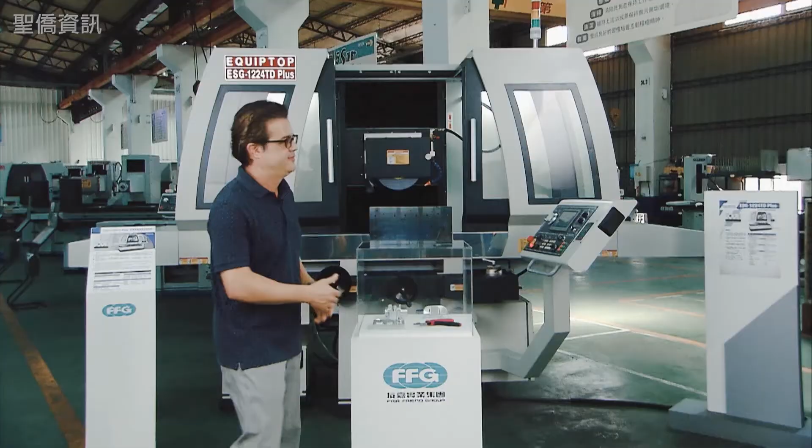Look at that. We're going to ask Charles, how did he do this? Charles? How are you? Nice to meet you too. How did you do it?

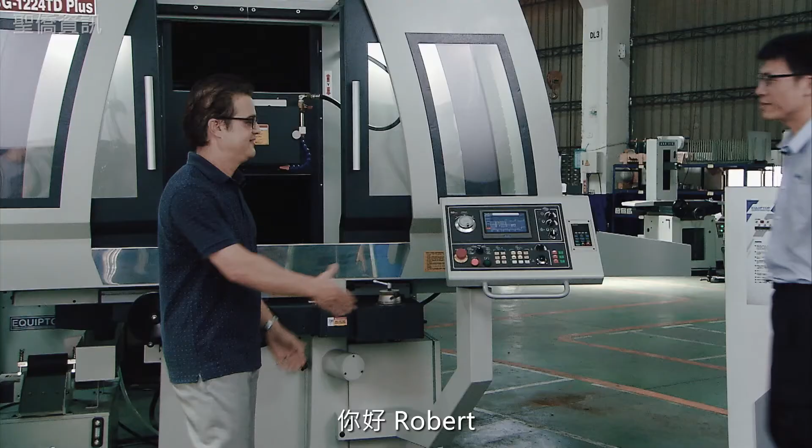Today we're at Equiptop, and we're going to have Paul Lin, the sales director of Equiptop, show us how to use this very well-designed touchscreen panel. Paul, can you show us how to use this? Hello, Robert. Nice to meet you. How's it going, Paul? How are you? I'm fine. Good morning, sir.

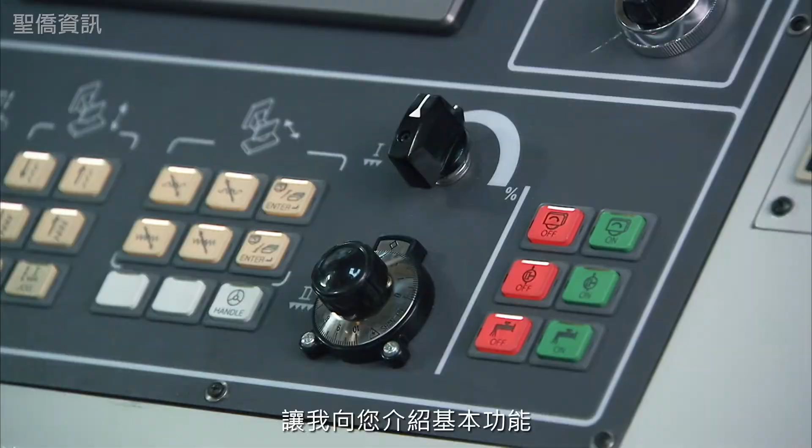Can you show us how to use this touchscreen panel? It looks very well designed, very well laid out. Let me introduce the basic function. This controller panel includes several languages depending on the demand from the customer. I'll show you the English version.

This machine displays the Y and Z position here by the encoder device. You can set the touch point and the distance to go, the position, and the rough grinding and fine grinding micron setting.

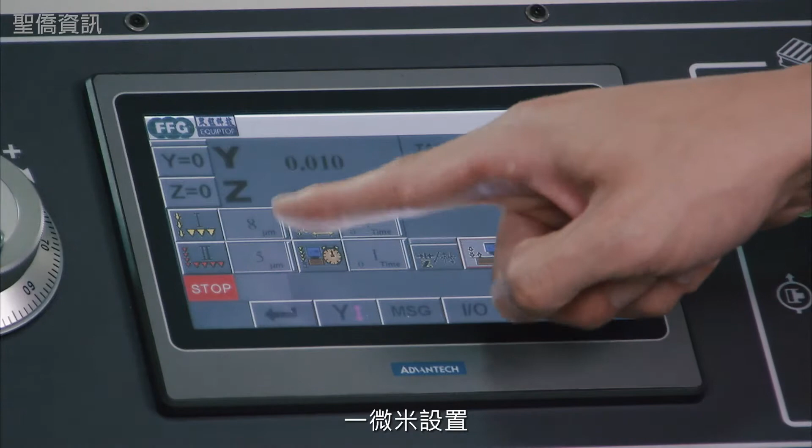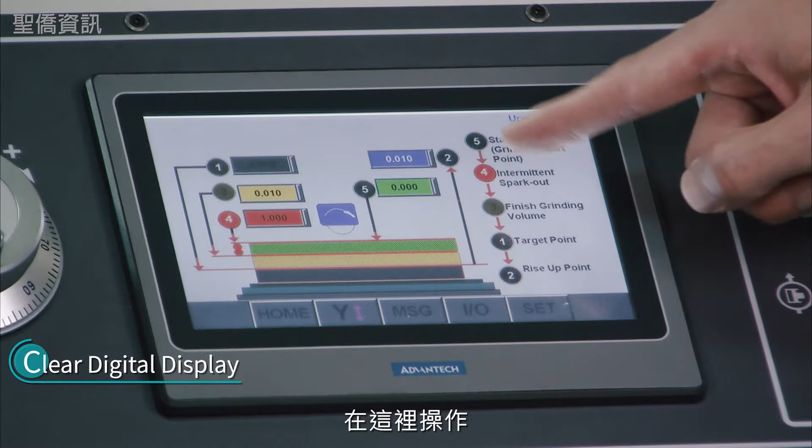This page is for setting the micro downfeed, the grinding value setting operation. You can set the target point, rise up point, and the finish grinding volume, intermittent spark out, and the start point. This page will show you all the alarm message recording.

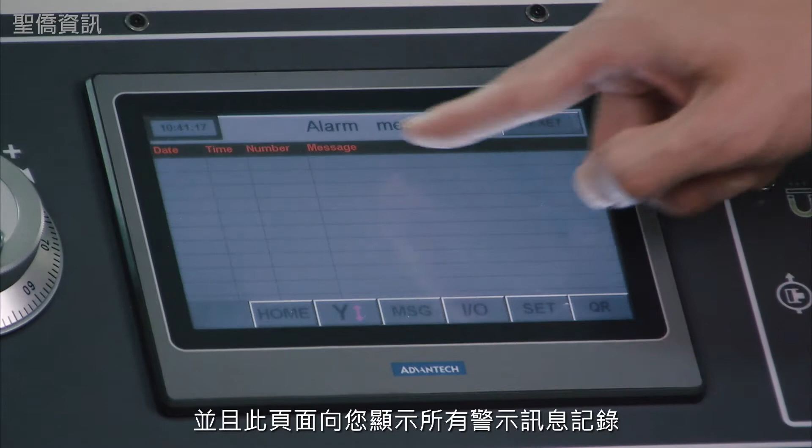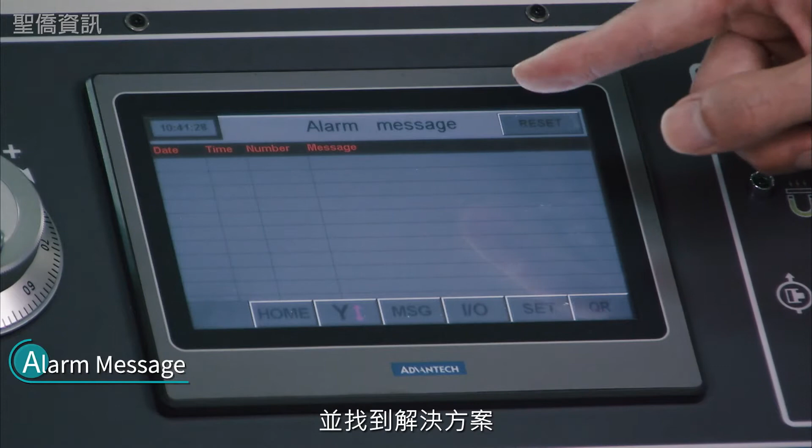Any problems, we can see it right here. We can see the alarm message showing here and find the solution with the technician and electrician immediately.

Also, this IO monitoring page is to check all the devices, including how this machine is running, such as the hydraulic system. You can see each device and what happened. This is very detailed and comprehensive.

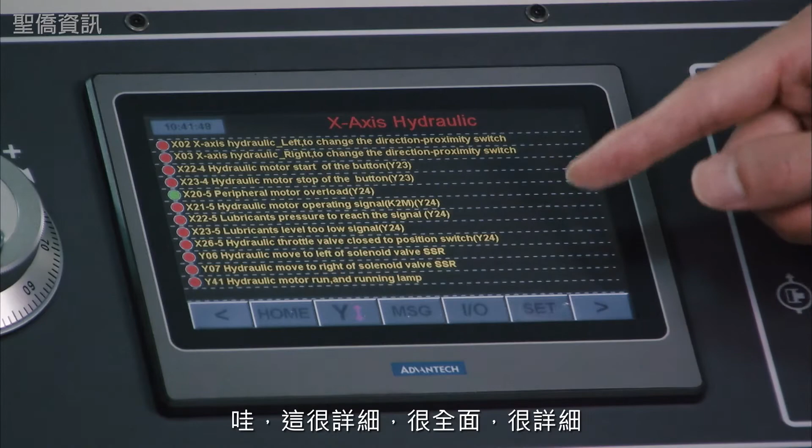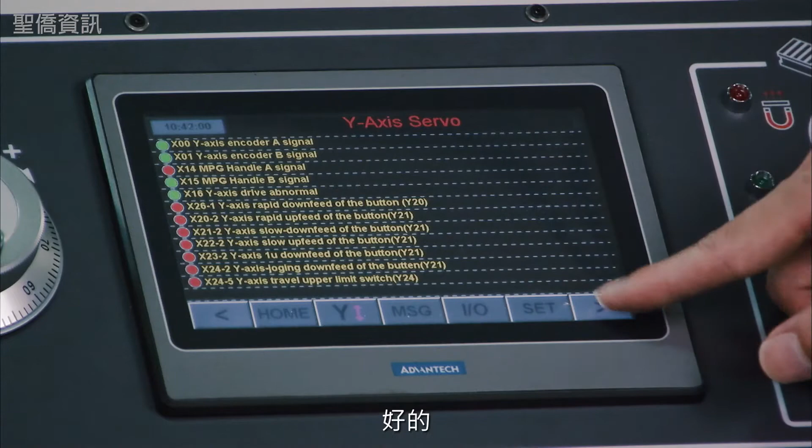You can see the servo motor for the Y-axis and its running condition here, like this one. And this is for the Z-axis servo motor.

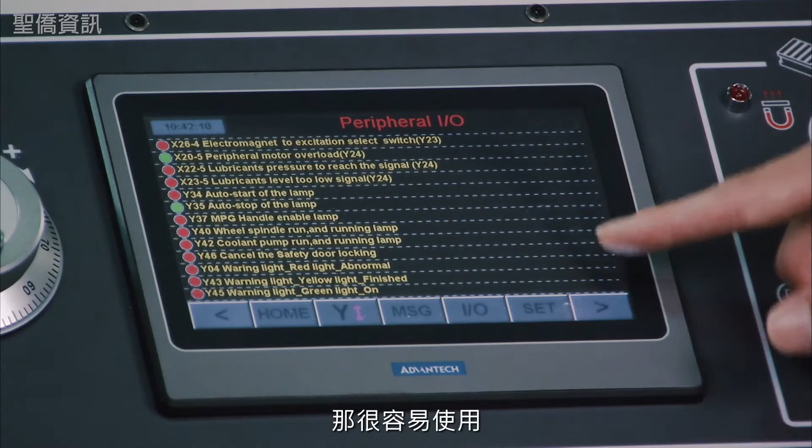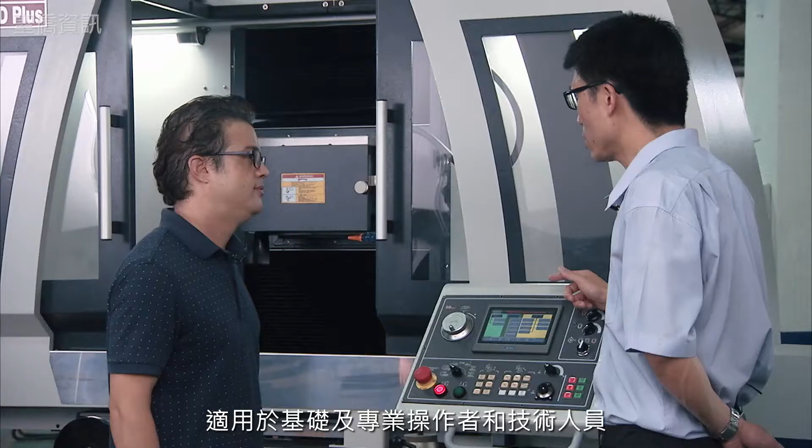It's a very nicely laid out panel. It looks pretty easy to use. It makes me want to get into the grinding profession. Sure, it's a friendly operation interface for the basic and for the professional operator and technician. It's easy to understand how to use it.

This is the parameter setting here. Any parameter could be set depending on the demand from the customer.

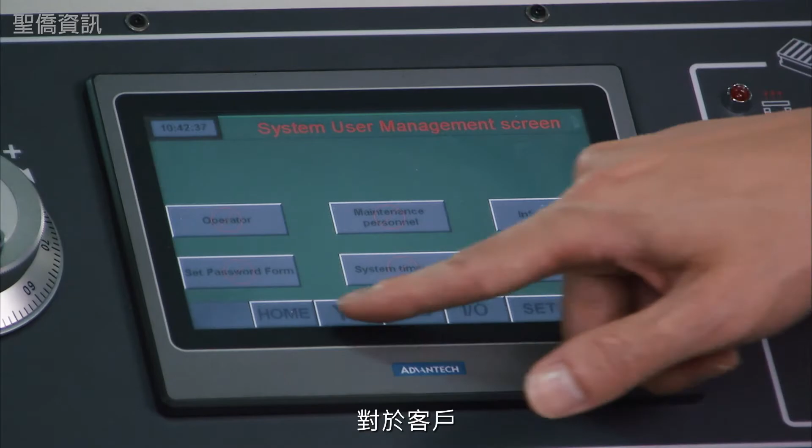So we'll show you the other function about this machine. Now turn on the magnetic power here, and adjust the magnetic power to the maximum here. And finish grinding. Now this is the demagnetizer - you can shorten the demagnetizer time here from this knob. This is a basic and easy function to control the magnetic power.

And this one is to control the grinding wheel, hydraulic system, and coolant system here. And this one controls the rough grinding speed, and this is the fine grinding speeds here.

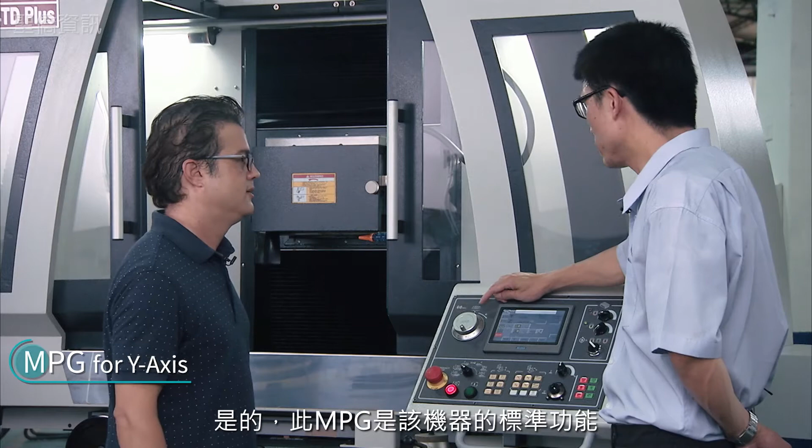I see you even have the MPG in the control panel. Yes, this MPG is a standard function for this machine. It could be adjusted 1 micron each down when you turn each graduation here.

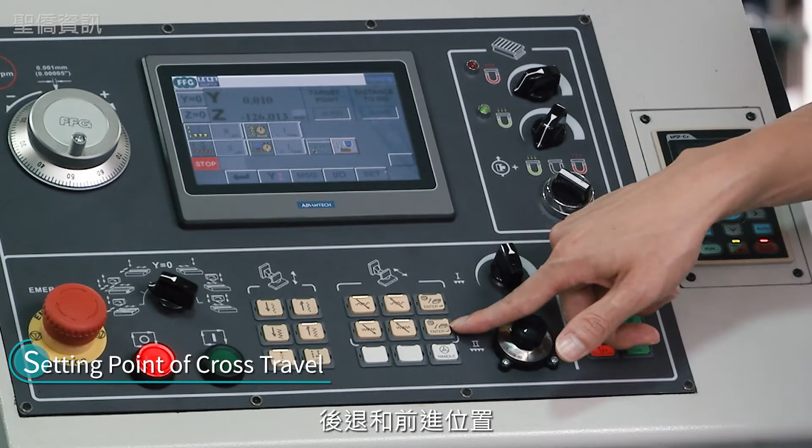That's very easy. It's a very fine resolution here. And this is for setting the setting point for backward and forward position. When you want to operate the cycle start here.

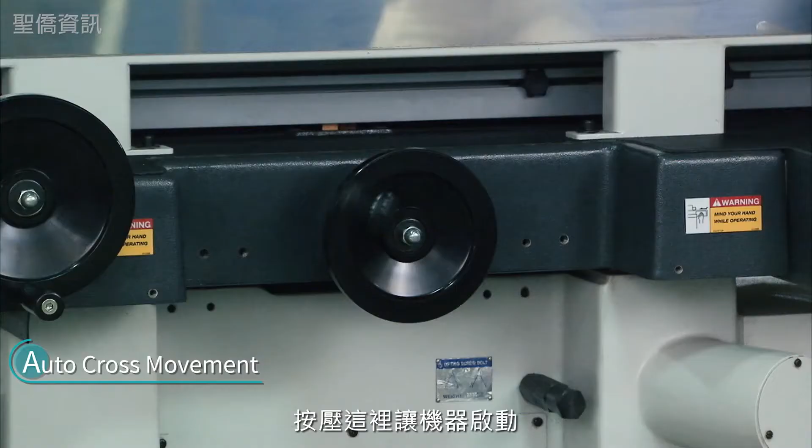Just push here. I think I can do this myself. Yeah, you can see it yourself. Very good. This moves the machine manually, and it's very easy.

You can see the real-time position. You can see the position to move the table, depending on the size of the workpiece here. This is vertical, up and down. And this jog is for 1 micron down.

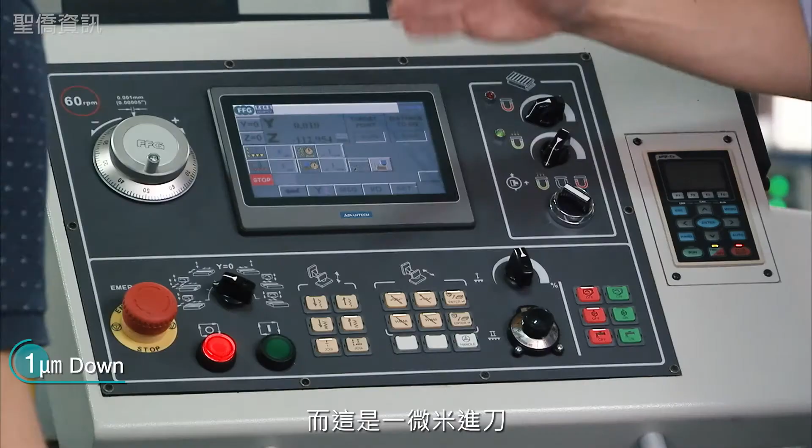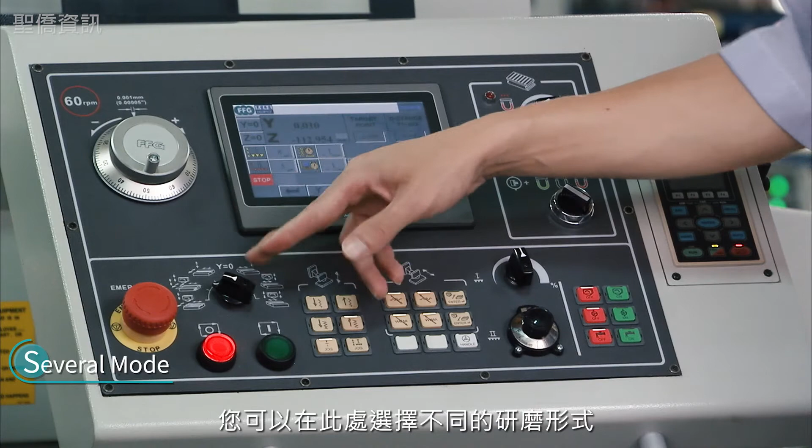You can select a different grinding mode here. So this is the standard and the professional grinding machine. Now, what is this over here?

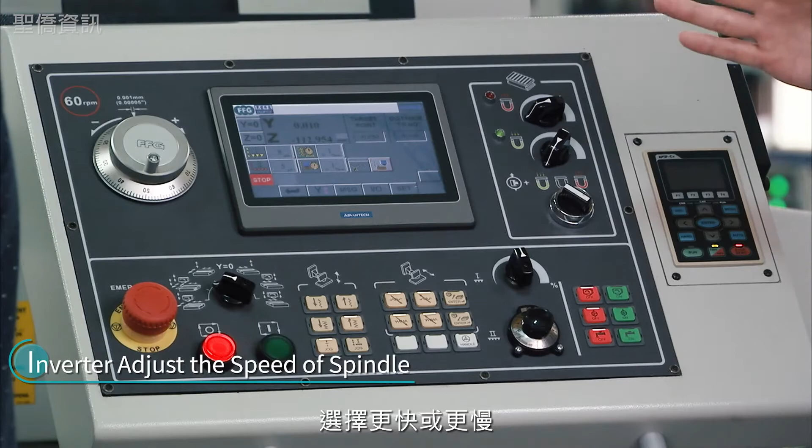This is the inverter to control and adjust the speed of the grinding wheel. So you can select faster or slower grinding speed, depending on the grinding material, to provide higher accuracy.

And surface finish requirements. Now, Paul, can you tell me a little bit about the structure of the grinding machine?

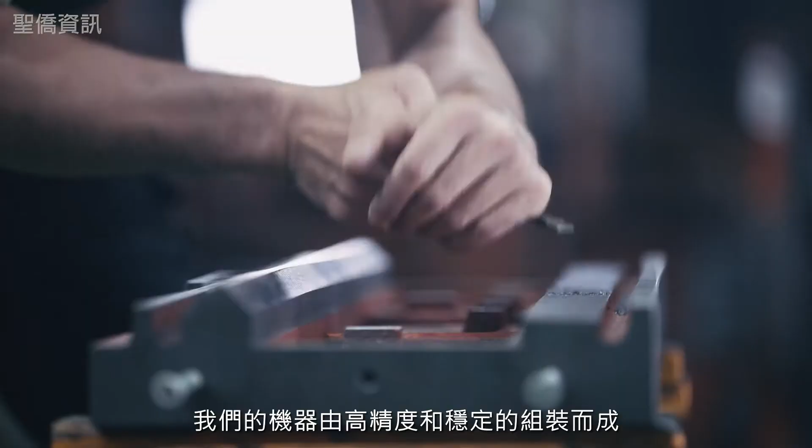That is a critical part for your whole operation, precision and accuracy. Our machine is constructed by high precision and stable iron casting supplied by Meehanite for the base, for the column, for the machinery body.

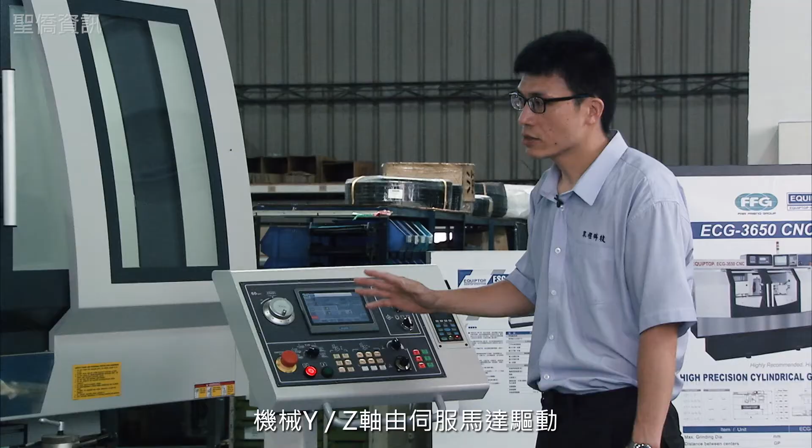The machinery Y and Z axis are driven by the servo motor inside the electrical cabinet, and the X axis is driven by the hydraulic system. This hydraulic valve controls the hydraulic power, to control the speed about the machine running.

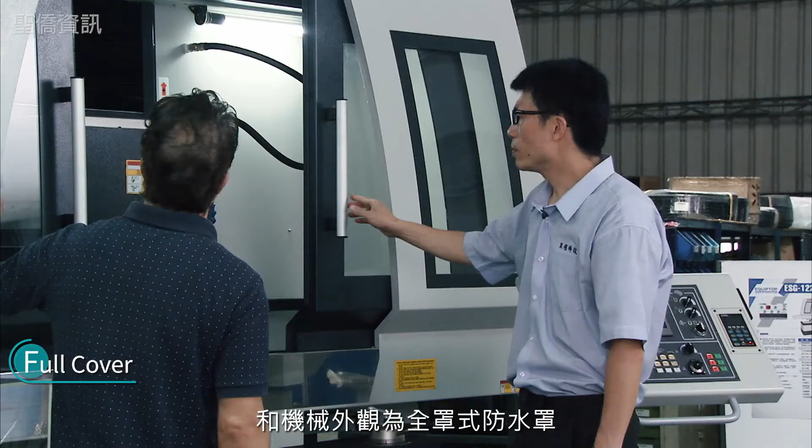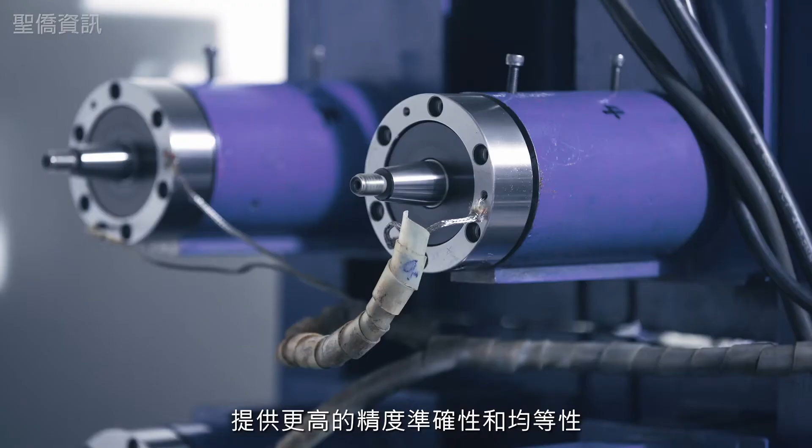The machinery overview has a full guard with top cover to provide better protection for the operators. And the bearing inside the spindle is supplied by NSK with higher accuracy and quality, precision, high quality bearings.

We can install the optional auto dressing system and the compensation system on top of the grinding wheel. Normally here it's an option, our ADC system.

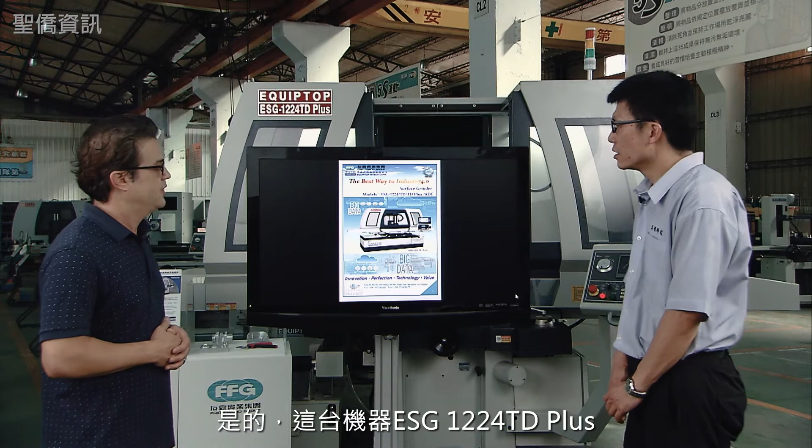Now we're going to hear from Paul more about the smart manufacturing capabilities. It's intelligent, it's networked, and it's got lots of features to help the operators. This machine ESG1224TD Plus is the best way to Industry 4.0.

Later I will introduce information about the network and monitoring system assembled in this machine. This machine includes cloud computing, big data, HMI, and IoT system. It also provides efficient network service such as integrated network information, in-time maintenance with guidelines, remote checking and system maintenance, reducing service time and increasing efficiency.

It also collects maintenance data and builds a database. The machine monitors all equipment continuously, setting parameters without temporary stoppage, and transfers and stores data in cloud service by internet.

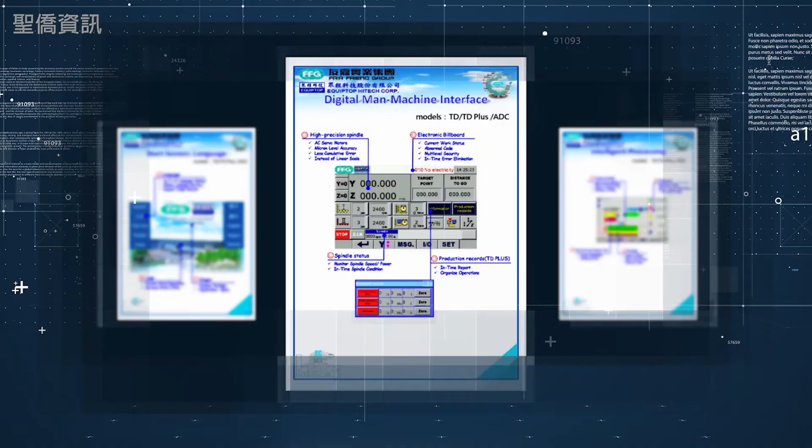The digital man machine interface includes the high precision spindle, the electronic billboard and production record, also spindle status. Intelligent processing includes rough grinding, a flow chart about the grinding value setting, and the grinding system, also intermittent spark out.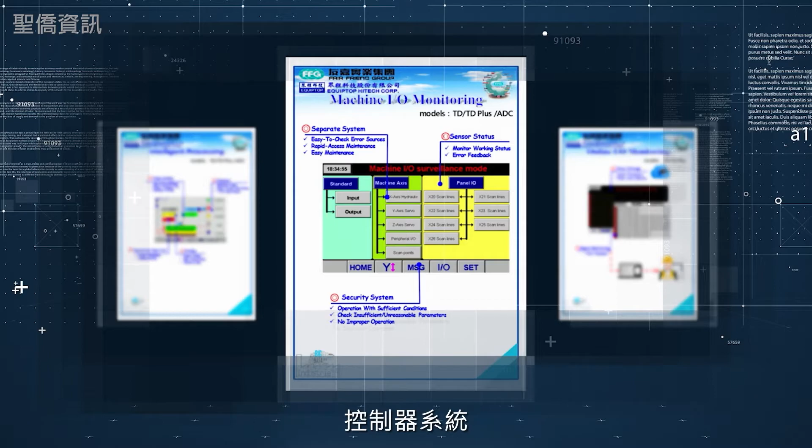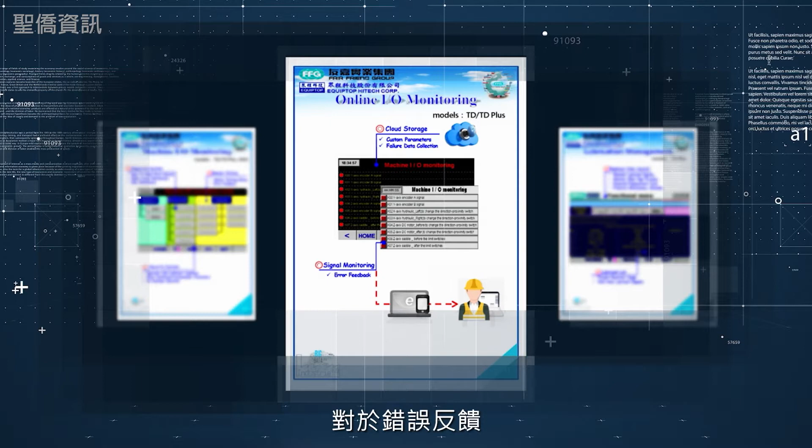The machine I/O monitoring is a separate system, and the sensor status also includes the security system controller system. The online I/O monitoring provides cloud storage and signal monitoring for error feedback from the manager and operator systems.

Lubrication management provides information about the lubrication oil, for when the operator would like to replace the lubrication oil and for other maintenance systems.

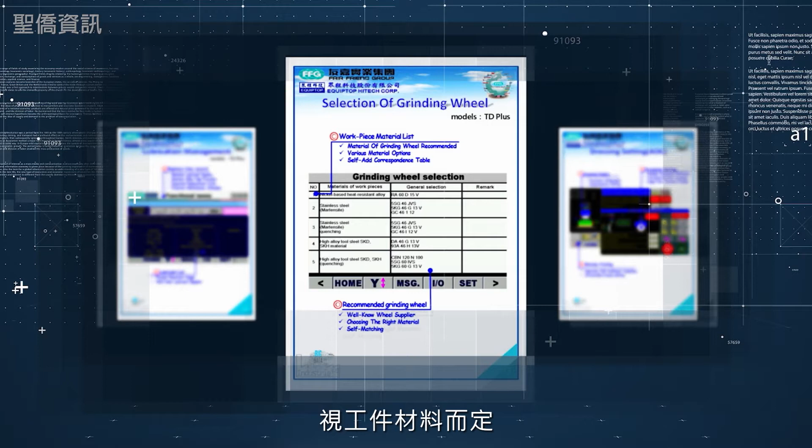Selection about the grinding wheel depends on the material of the workpiece, and the customer and operator can choose the available materials.

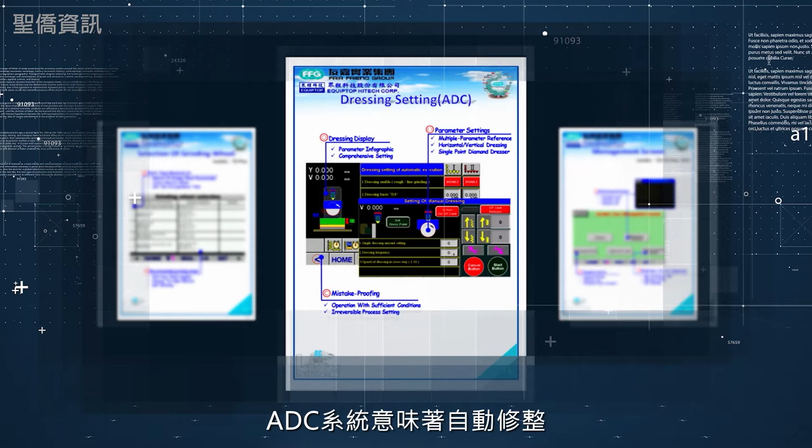The ADC system means the auto dressing and compensation system, and provides the dressing display, parameter setting and mistake proofing.

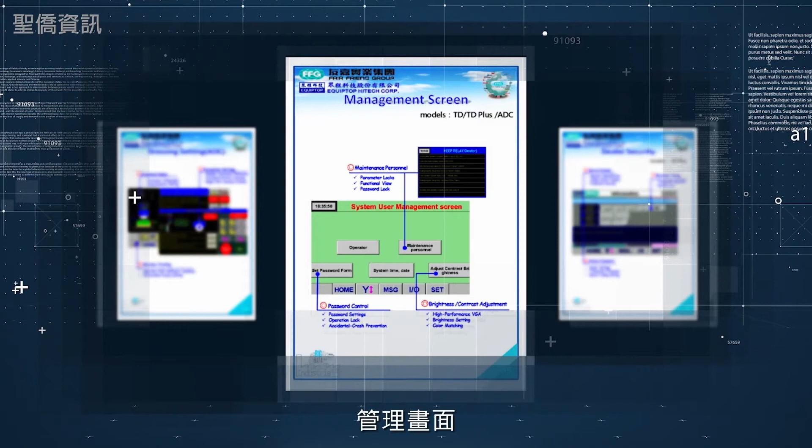The management screen includes parameters for maintenance personnel. And the dealer security system provides the machinery serial number, machine timing, and unlock password.

The big data database provides functional menus. The system maintenance provides machine maintenance parameters and setting parameters.

The driver debug is the alarm code that will be shown and displayed in the servo motor, and the customer and operator can refer to the menu operation to find the alarm code and find possible solutions.

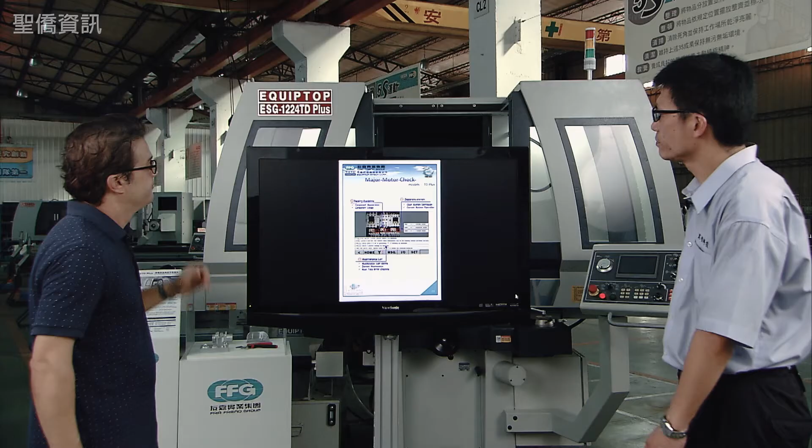Finally, this machine has received the patent certification about the controller in Taiwan, providing necessary and helpful information for the customers.

That's amazing, it's got so many features. You got a patent, you have smart features, it's intelligent, it's networked, it's everything somebody could want in a grinder. Thank you very much, Paul, for sharing this. Thank you, Robert.

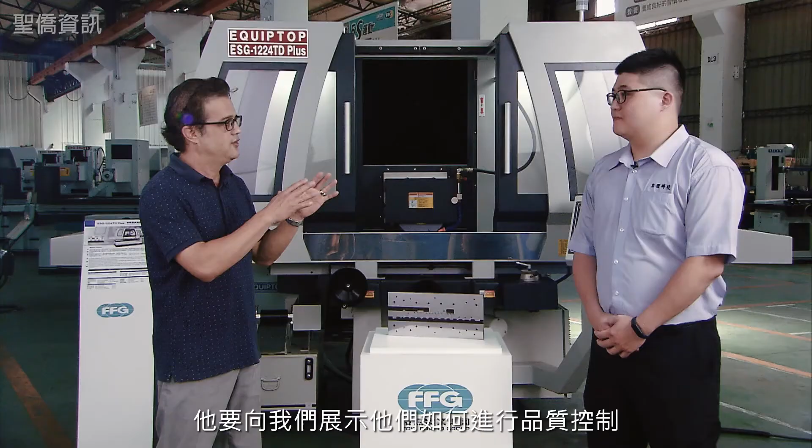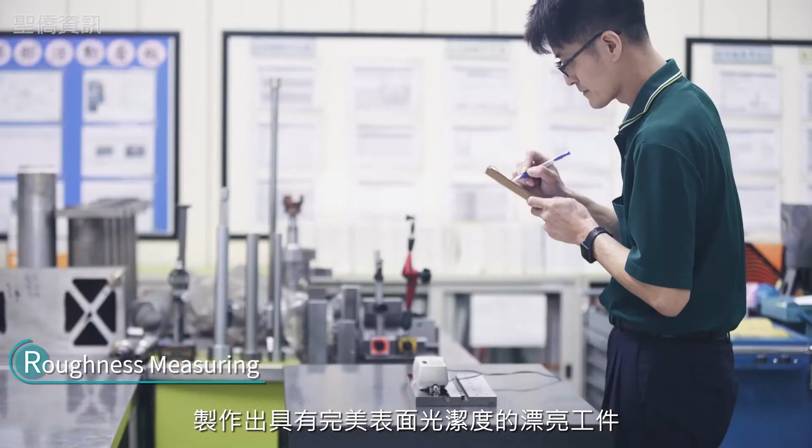Now we have James, a sales engineer with Equiptop, and he's going to show us how they do QC for this company. Welcome, James. Nice to meet you. Your boss said to make a beautiful workpiece like this with a perfect surface finish requires really important things, especially quality control. Can you tell us a little bit about how you guys do it here?

First, I want to introduce our spindle. That's the key part, very, very important for our grinding machine. In our spindle room, it's a small dust-free room.

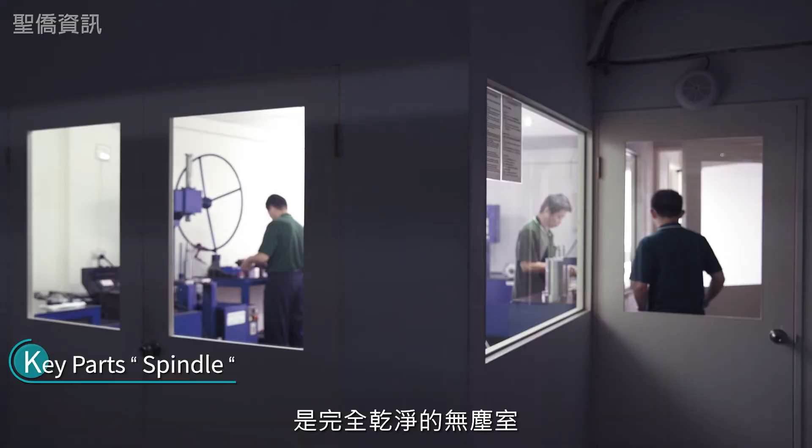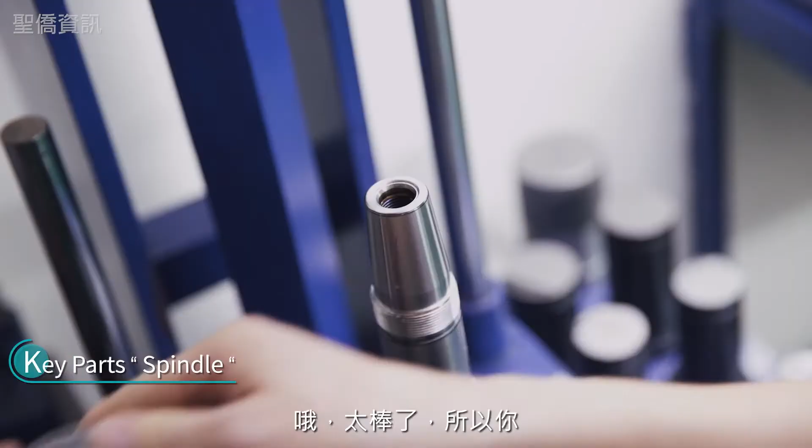We have to ensure our spindle will not be contaminated during the assembly process. So you assemble your own spindles? Yes. That's really critical, because if you handle this part well, it's going to make a perfect machine. That's great.

Now, I see lots of signs around here, and I'm feeling there's something different you're doing for your manufacturing and quality control. What do you guys do here that's different? Yes, let's call it lean manufacturing. Oh, lean, yes, it's strong. It's very strong, and the most important part is continuous improvement.

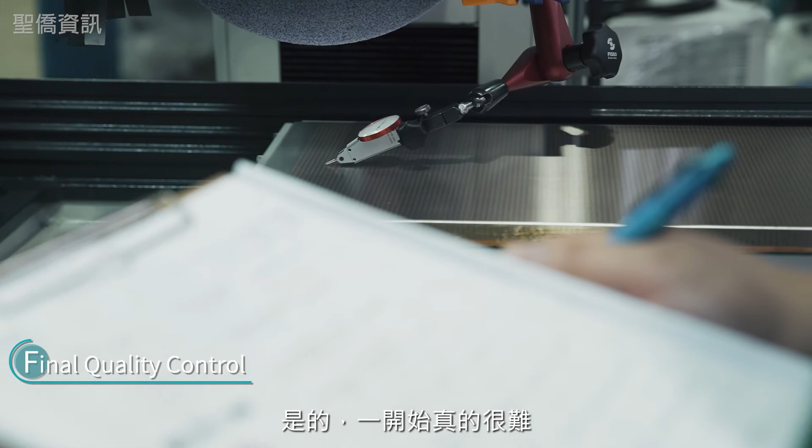Now, that's not easy to do. I hear from a lot of people that this kind of system is very painful at the beginning. Yes, it's really, really tough at the beginning, but after you use it, you will rely on it day by day, so you can keep away from problems.

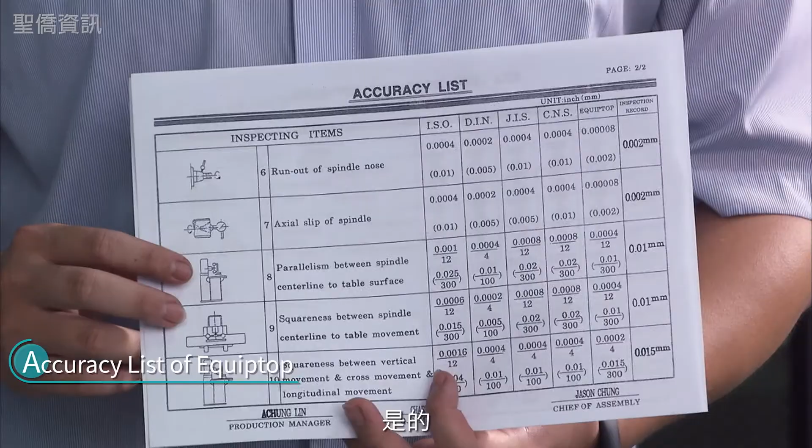Perfect. Now, I saw that you have some kind of list here. This has something to do with how you inspect each machine, right? Yes, this is our accuracy list, compared with international standard inspection like ISO, DIN, JIS, and CNS. So we set up our own standard.

So all these Equiptop standards are a bit higher than international standards. Even quite a bit higher than international standard.

Well, let's see some grinding. Can you show us? Okay, let's go.

Now, Equiptop has said they've sold over 2,500 of these TD series machines around the world. That means there must be lots of customers who have good things to say about these machines, right, Paul? Yes, sure. The areas we're selling our machines not only in Taiwan, but also United States, European countries, Asian countries, and other countries too. So later we will show some witness videos from our agents around the world. Excellent. That means we have some good things to see. Stay around and see some witness testimonials.

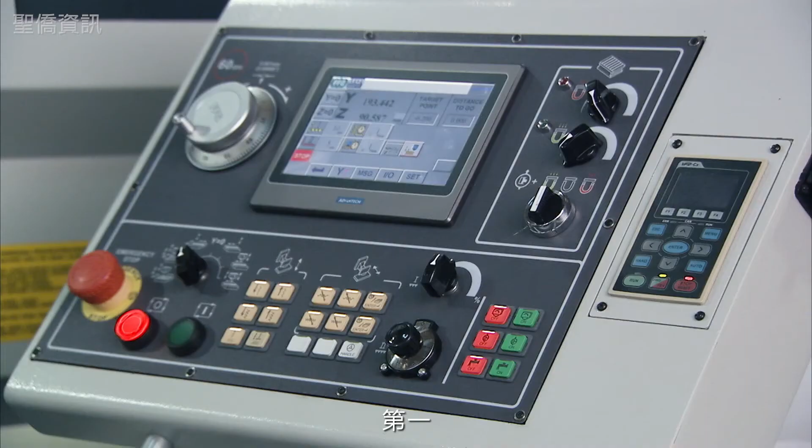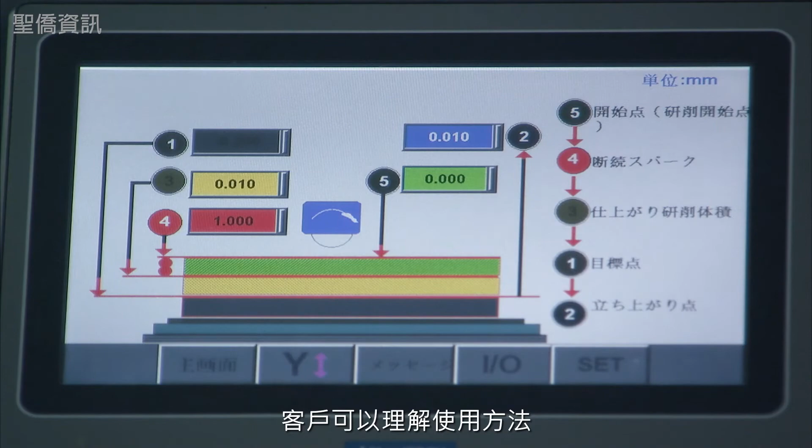The main difference between our machine and the competitor: first, our machine can input and include several languages for different customers, so the customer can understand how to use it through messages in different language versions, making it easy to operate the machine.

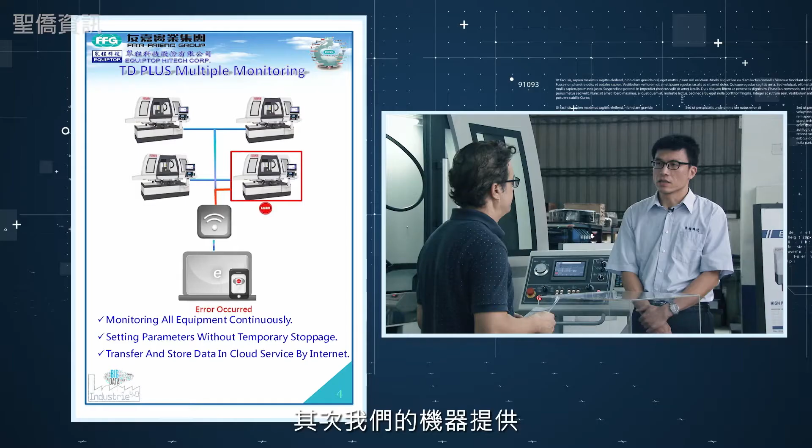Second, our machine provides an instant monitoring system. This is very important, as the service engineer and electrician can find a possible solution according to the alarm codes displayed on the controller panel.

Third, our machine could be installed with an auto dressing and compensation system on top of the grinding wheel, so the grinding wheel doesn't need to move down to the table to be dressed. The wheel can be dressed immediately by the dresser in the auto dressing device.

And finally, our machine has over 2,500 machines sold to the world. No matter in Taiwan or in other countries, they are our best witness to our machinery's high quality and best information systems.

Now, when comparing your machine with other machines, of course you have very top and tough competitors from Europe and from Japan. How do your machines compare to some of those top brands?

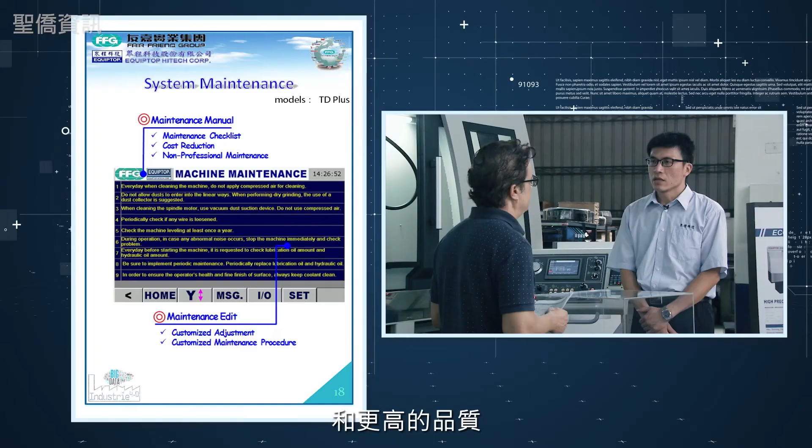Compared with the other competitors from Europe or Japan, we can provide the machine with lower cost and higher quality. Our machine provides an instant service system inside, with network and monitoring systems, so it's better. Higher CP - cost and performance - much higher.

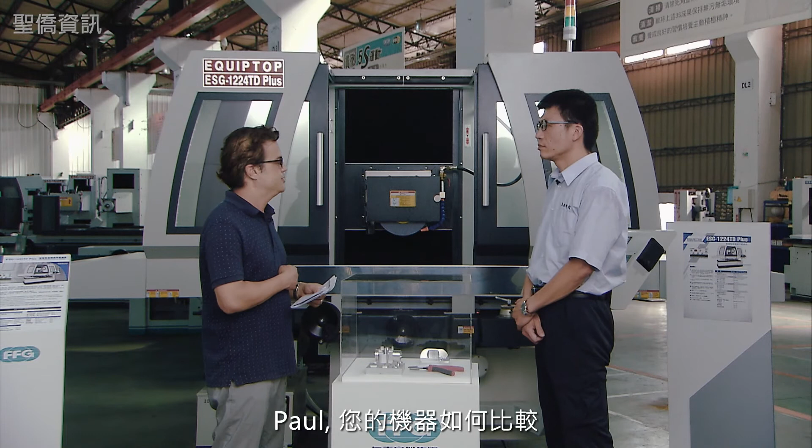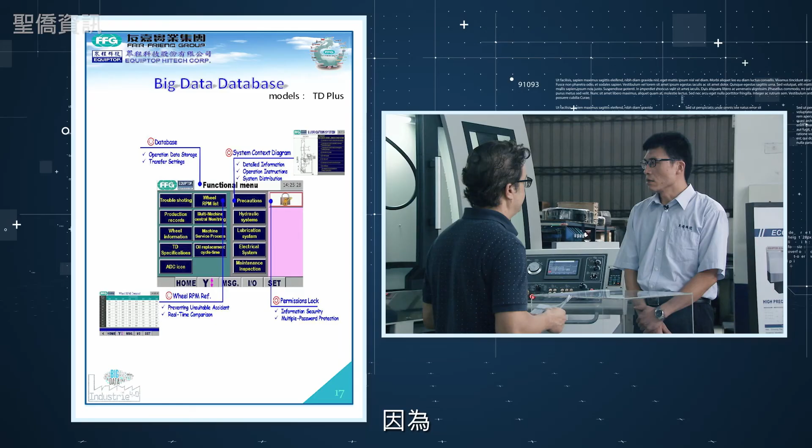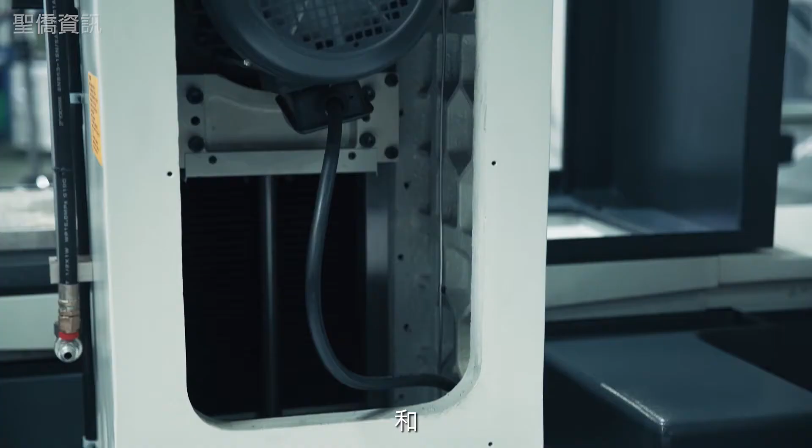How does Equiptop compare from a quality standpoint with European or Japanese machines? Our machine provides higher accuracy because the monitoring system inside provides necessary and helpful information to support the technician and operator to find a possible solution. Our machine also provides stable operation and nice quality due to the nice iron casting during assembling.

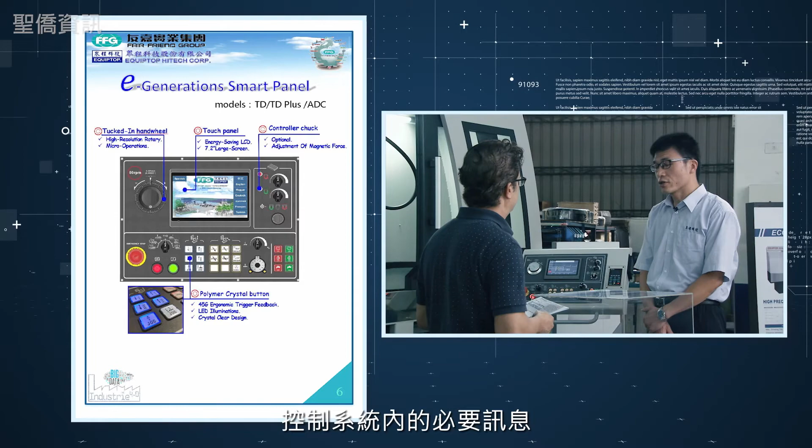When you compare to these other famous brands, like Studer, what are the major differences? I think the main feature of our machine is the necessary information inside the controller system, providing helpful and instant service information to support the operator. If they find a problem, the operator can find a possible solution immediately through information such as the grinding wheel data and short troubleshooting information.

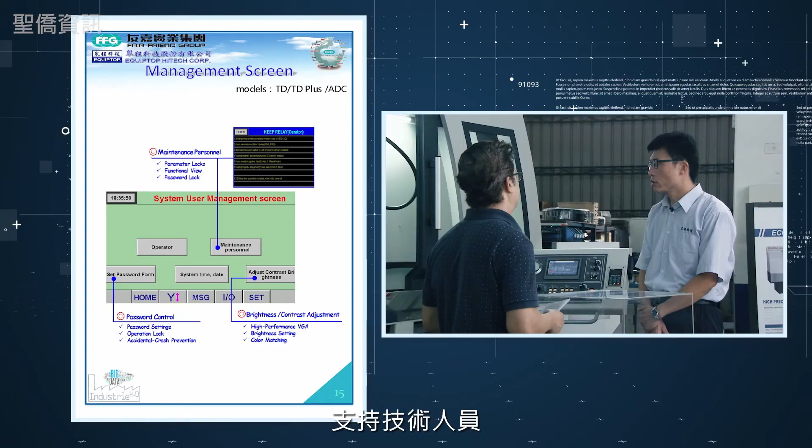This is all within your database system, right? Yes. You have an extensive database - you've sold 2,500 machines, so you have a huge amount of information. Our database inside the machine includes a lot of helpful information to support technicians during the grinding operation. Our machine helps find a possible solution if any alarm call shows, providing necessary information like menu operation instructions.

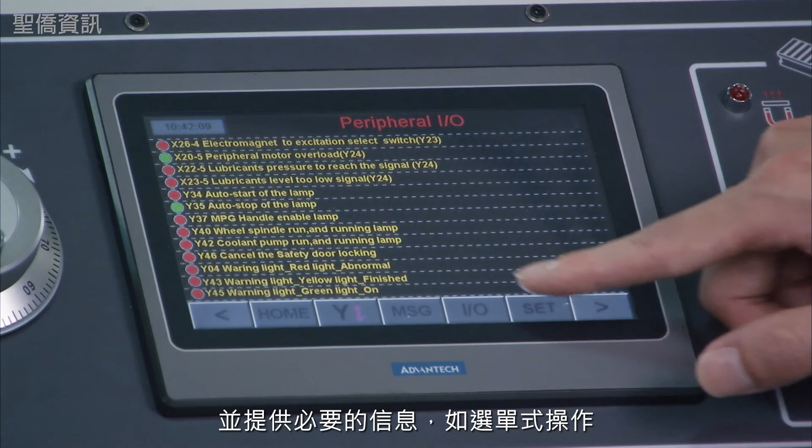But the technician doesn't need to find the paper operation manual - they can use the controller to find any possible way. That's very helpful.

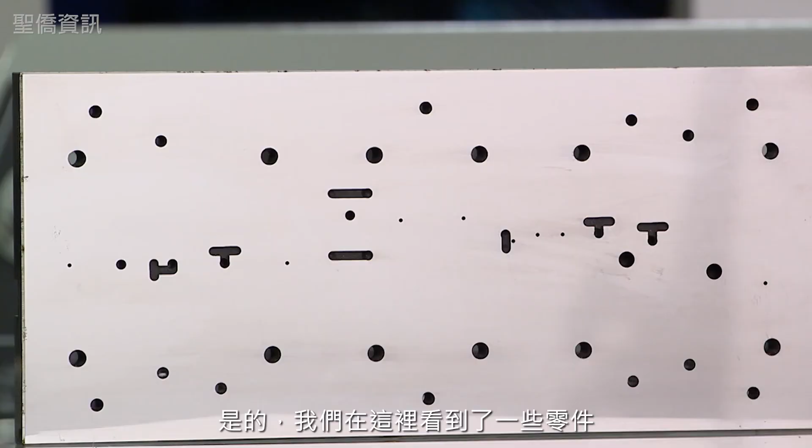Now, how about application-wise? What kind of applications or industries is this machine suggested and recommended for? Our main customers using our machine focus on the mold industry and auto parts industries. They can grind the mold with basic rough grinding or fine grinding to achieve mirror surface grinding, like some of the parts we saw earlier, here with the mirror surface grinding application.

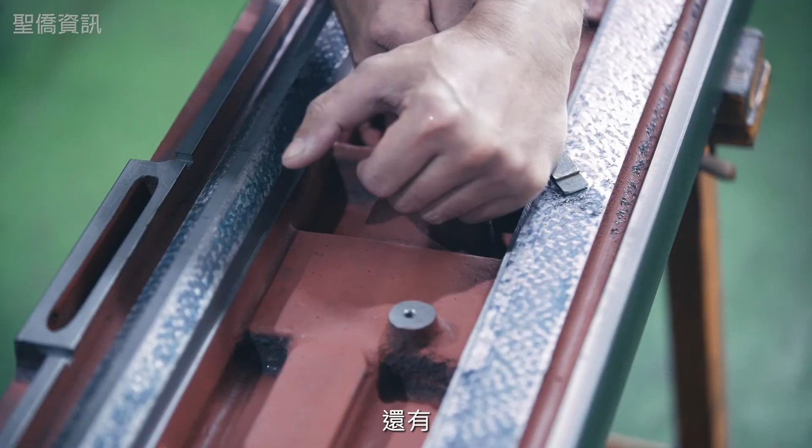Why is your accuracy a bit higher than other brands out there? What are the specific reasons why it's more accurate? I think the machinery accuracy depends on the assembling quality and the quality of the iron casting. Our machine has better features because our iron casting provides heavier material and stable operation for customers.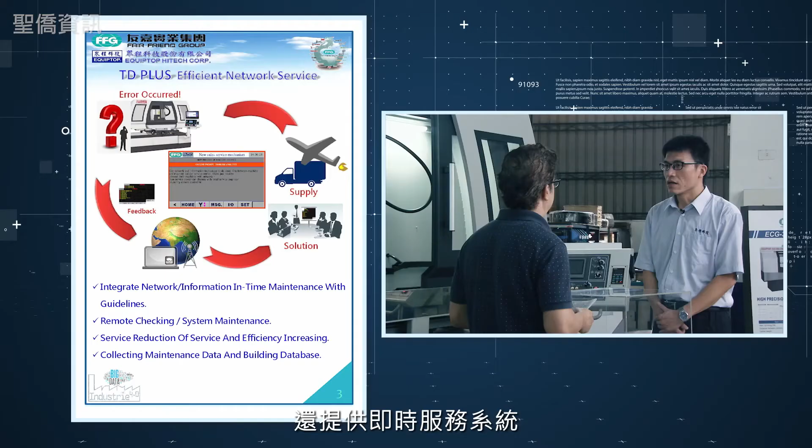So our machine provides nice accuracy because of the stable iron casting and nice assembling method, plus the instant service system and electrician support inside the controller system. So it's a nice choice for our machines.